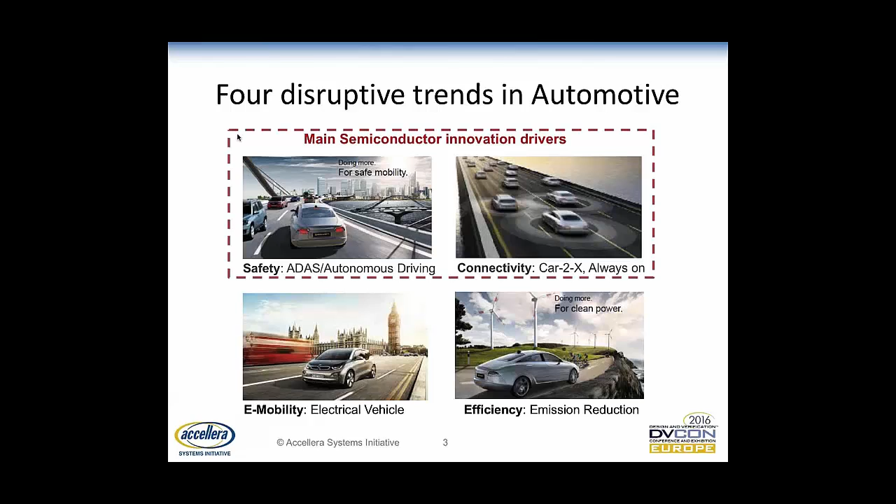Well, it's going to impact us from the perspective of we will now have to be proving the safety integrity of the designs. And from a legal perspective, there is an audit trail now from the system supplier to the subsystem supplier and eventually all the way down to the semiconductor supplier. So all of a sudden, this becomes an extremely important thing for us to understand and to try to go implement. So obviously, Cadence, our competitors, virtually everyone who's involved in automotive, this becomes a very interesting area, and everyone's investing to try to address the needs of the standard.

Now, the standard is an evolving standard. The standard does not address everything. It's not overly definitive. There's a lot of very vague areas, but it fundamentally comes down to three important areas. One is around safety culture and having requirements tracing from system all the way through to component, to be able to prevent problems from arising. Two is being able to actually do measurements. This is sort of metric-driven verification on steroids, right?

It's functional verification at all levels of abstraction from the RTL through, as our previous speaker talked about, software levels. It's safety verification to measure the response of the system to undesirable or unplanned events, and that's where we get the famous stuck at 0, stuck at 1 kinds of measurements that we now need to provide. And the last part is around documentation, which basically proves that the tools do not inject a fault or a failure into the end work product or the actual design, and that the tools are safe to be used in such safety-critical applications.

And of course, at Cadence, we're addressing all three of these areas, and I want to give you a bit of the highlights in terms of the overall philosophy and implications, but also what the approach is from a hardware development perspective. And when I say hardware, of course, I mean RTL.

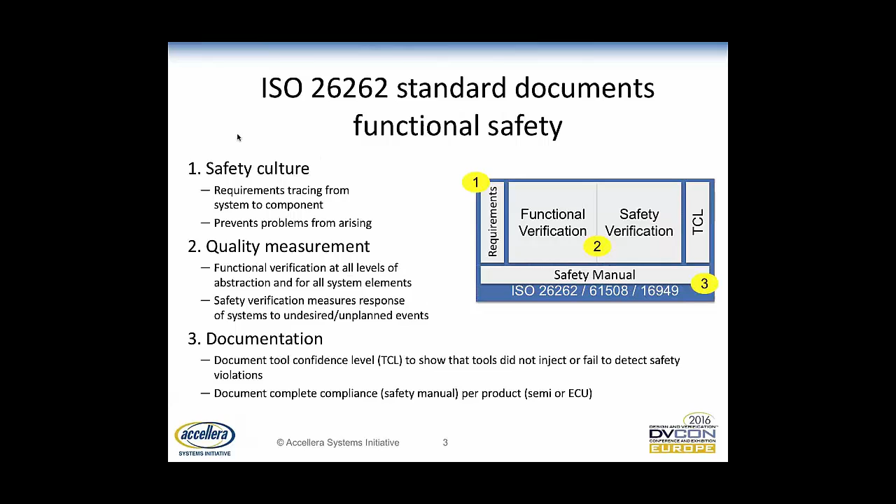So the implications for design and verification tools is that if you look at the diagram there on the left-hand side, we need an environment that does requirements traceability where we can combine verification and safety planning, where in the middle we've got this fault-tolerant design, and we're exercising the design not only from the perspective of what we traditionally do with something like a UVM test bench with functional testing, positive testing, but also now the idea of being able to apply negative testing to that same design to ensure that error scenarios are properly accommodated for. And of course, all this needs to reside in a common results database so that it can be traced all the way through.

And the whole idea here is to reduce the failures in time or FIT rate, the probability of an error on the functional side, and I'll contrast this with typical things that people do in test in a little bit, but this is not test. This is functional safety, and functional safety is much, much different than test. But I'll get into that in a little bit.

So our approach is to be able to take the same environment and apply positive testing, the functional test, and apply negative testing on the design, and to be able to verify the very specific failure modes, and to be able to statistically test to ensure design integrity.

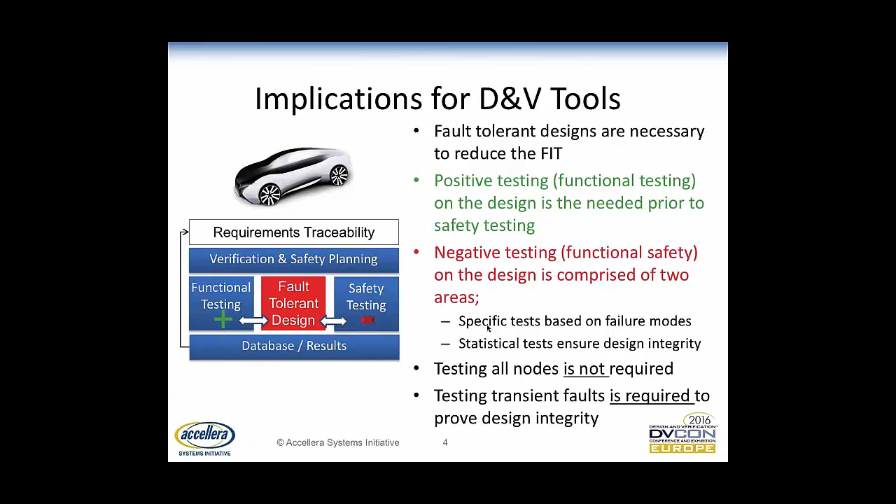One part of the standard that's not very well defined at all is transient faults. These are single event upsets, single event transients. These are things that are alluded to, and most people know that they can be very, very serious types of failure scenarios that have to be accommodated, but again, not very well described or very well articulated in the standard as of today.

So to make this more real, let's take a look at an example design and how we do this differential analysis. The very first thing we want to do is verify the correct system behavior of a design, and here we have a sample automotive design down below. We have MCUs that are redundant. We have a lockstep comparator, that's our safety mechanism. We may have a logic system. We may have some ECC, that's our error correction mechanism or a safety mechanism, and there may be some analog in there along with some ECC.

So we want to verify the design, very first thing, make sure the design works correctly. And so we use metrics to trace that, to verify that, etc. You guys know the drill there. Then we want to verify the correct system response, functional safety. So use metrics to trace the fault injection to the safety system output. And we want to be able to test enough to ensure the overall confidence of the system. So this is where the statistical part comes into play.

We want to measure the outputs of the fault injection. So you can see here on the left-hand side, we can be injecting faults at various areas, and we're going to pick up two fundamental pieces of information. One is the strobe output, which is effectively the functional output. In other words, what is the output of the circuit? What is it supposed to be providing? And then there is a second measurement, which is a safety system output, referred to as a checker output. And this is where we measure the difference between these two.

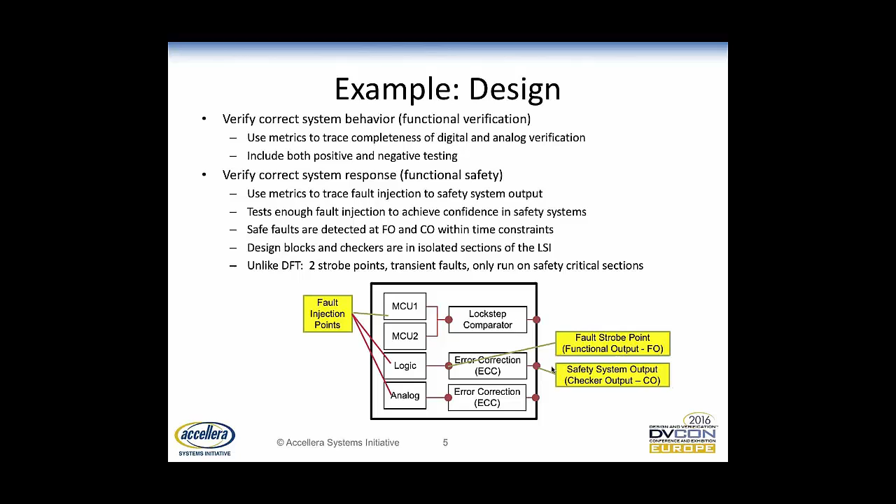And this is where it's really very, very different than DFT. This gives us a differential analysis, whereas DFT is straight injection. So we end up with two strobe points and transient faults, and we exercise that on the safety critical systems. So if we look at a classification, this is a fault safety classification that we use to try to simplify things a little bit.

On the left-hand side is that functional output, and up top is that checker output. So we have two scenarios for the checker: it's either undetected or detected. And we have two scenarios for the functional output: a fault is either detected or undetected. The one that really is dangerous is where there is a functional output and a fault is detected, but it is not picked up by the safety circuit and the checker undetects. It does not detect the presence of that fault, so therefore it cannot take corrective action.

All the other cases are safe, some more safe than others, but you can read the descriptions here in the diagram and get a sense of what that means. So diagnostic coverage effectively is the bad stuff divided by the good stuff. We want to know on a percentage basis how much of the design did we cover, how much of it is stuff that is undetected, where there is a fault but it's undetected, versus all of the other scenarios that are safe. So this is the way that we do differential analysis through the simulator.

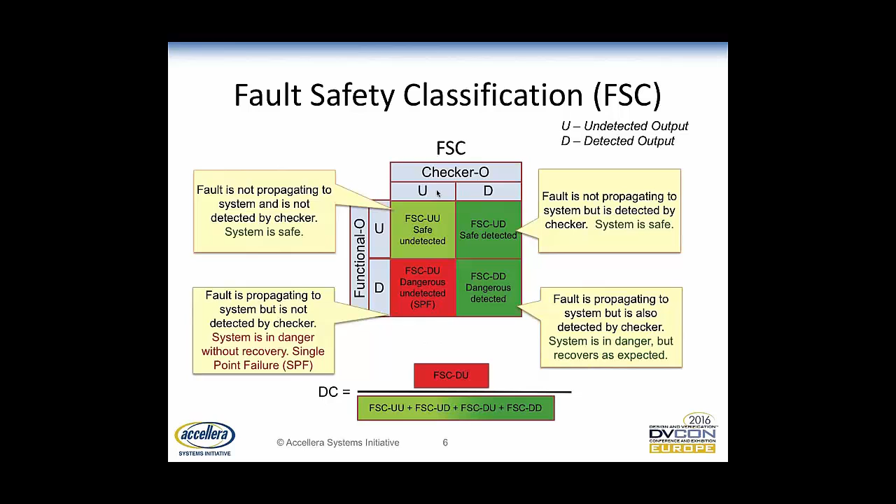And the one thing that we've seen is that the brute force approach, doing forces, for example, trying to do this with assertions, trying to do this with just pure brute force fault injection, is not going to scale. It doesn't have the ability to handle large-scale designs in any kind of an efficient manner. What is necessary is to be able to apply this greatness of constrained random with the ability to do sampling and to have a formal guided approach, because there are some scenarios that will just never happen and we can formally prove that.

And there are other scenarios that we want to make sure we focus on, because that's a critical part of the overall design. So it's really this combination of automation of constrained random with sampling with formal guided that is going to get us the best possible ability to validate and verify the safety integrity of the overall design.

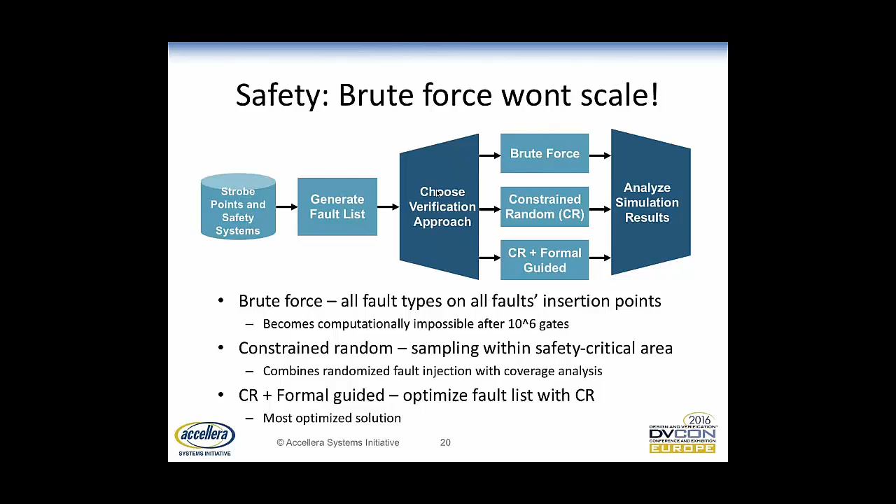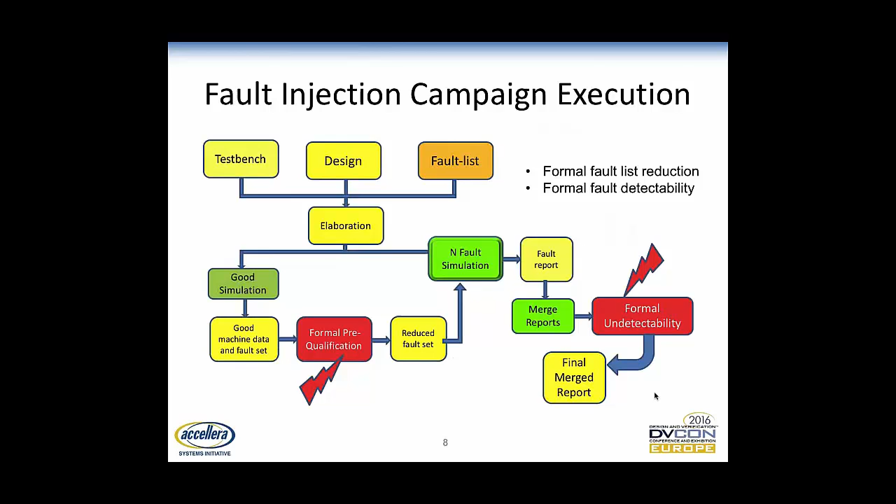This provides us a report of diagnostic coverage, merge that coverage data together, very similar to the way we merge functional coverage today or code coverage today. This all gets merged together. We can apply, again, formal undetectability analysis to some of those outputs, and then we get a final merged report. So you get a sense of what that flow would look like from a simulation and combined formal perspective. Tool confidence level is another big piece of it.

TCL is a mandatory part of the ISO 26262. It's covered under Part 8, supporting processes. Customers need to supply what's called a software tool criteria evaluation report for each tool that's used for each design. And I want to make a note that tool confidence and functional confidence are not the same thing.

Tool confidence says: is the tool and the ability of the tool to detect errors good enough to develop a safety critical design, and does it not inject a possibility of a failure, a critical failure, into the design itself. It has nothing to do with whether the design works or not. It just has to do with whether or not the tool works. So TCL is exclusively a measure of the ability to detect the tool errors.

We provide use cases for each of our tools. Each of those use cases has a set of inputs, a set of outputs, and a set of error scenarios that are known to us, and therefore are known workarounds or known mechanisms to ensure the integrity of that tool. So we provide the complete TCL documentation that will save our customers time and resources.

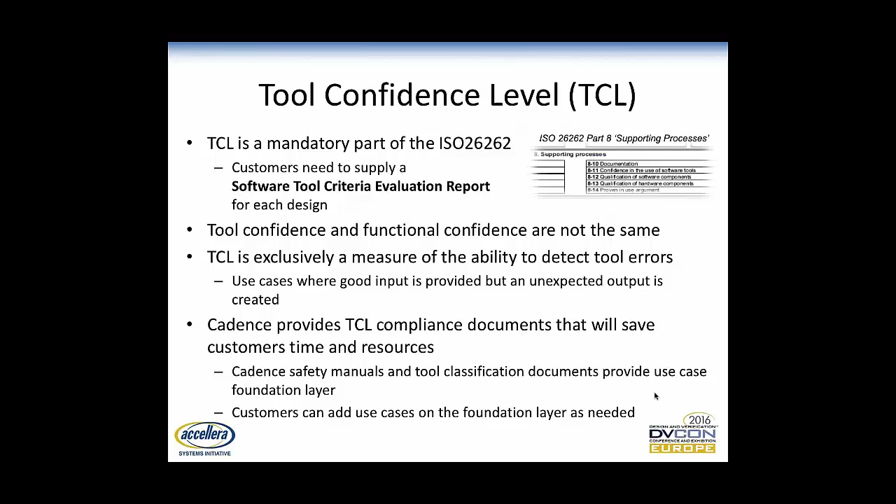They take our templates, they modify our templates, and as long as they follow those instructions and add to it maybe any additional things for their own particular use, they're good to go. So this effectively becomes a foundation layer that's necessary for a part of the overall ISO 26262.

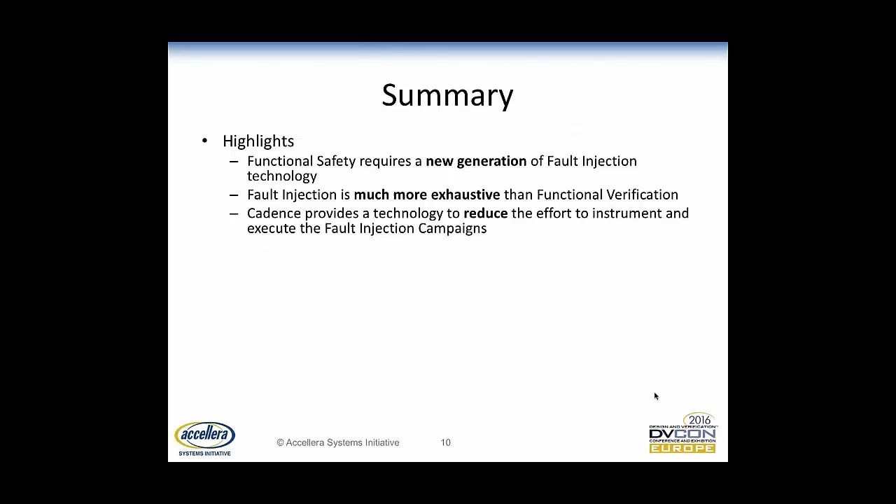Oh, okay, good. So I guess in summary here, functional safety requires a new generation of fault injection technology. This is actually more exhaustive. It requires more resources. I didn't get into this part of it, but it is actually more exhaustive than functional verification. We provide the technology to reduce the effort to instrument and execute those fault injection campaigns.

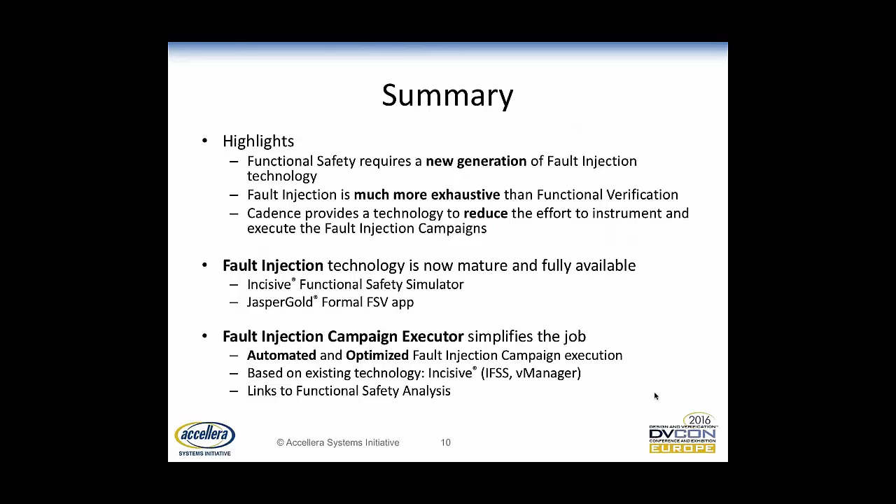The fault injection technology is going to be an emerging area for probably the next 5 years at least. But we've got the starting point of it now with functional safety simulation, with formal technologies, as well as with fault injection campaign executors to simplify the overall job and make it a little bit more automated for you, a little bit more optimized for you, based on existing technologies.